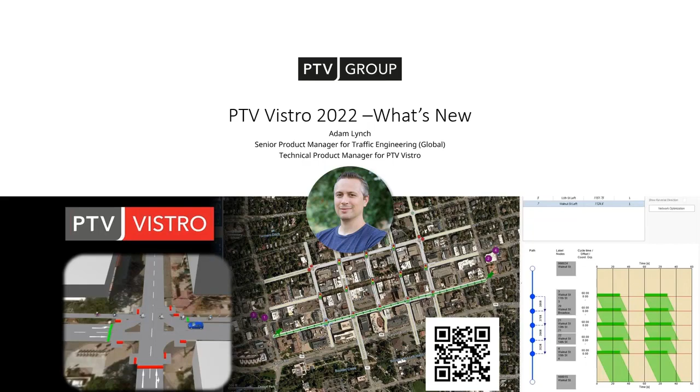So I'm going to begin our first part of the presentation with the what's new. It's again great to see so many of you joining our session. I think we're up to about 150 or so attendees right now, so that's pretty amazing to end a year with. And I'm very excited that you're excited to learn about our what's new and also about the HCM 7.

I do want to give you a little bit of a look at some of the recent activities that we've had in our Vistro community. I think this is a good place to end the year. A lot of this is because of your efforts. And the first thing I want to highlight here is this video that's up in the top right corner. This is a presentation from Beth Ostrowski and Adam Moser. And this was presented at the ITE spring meeting, so it's not brand new, but it's been around since the spring meeting, and it's for the Tennessee section as well as the Deep South joint meeting that they had.

This is a great video that discusses benefits of Vistro, especially coming from someone else other than us. So it's always nice to see it from the other side of the fence, as well as you get to see how Vistro is being applied on real projects and not just our examples that we show you. So it's definitely something I would say try to Google for, or when we pass out these slides, maybe we can send you this link to this one.

But definitely, if you have presentations that you're presenting in the industry, please let us know. And of course, we like to collect these and potentially share them as well with other customers and other agencies. So thank you again for all of your efforts with the presentations and mentions of Vistro through the past year.

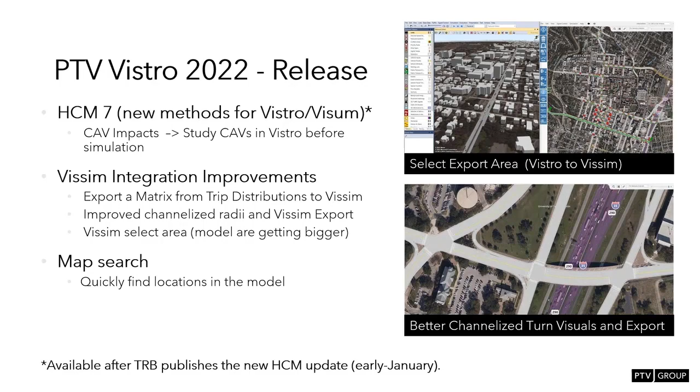Okay, so first, let's look at this function right here. This is the trip distribution matrix import to PTV Vissim. It's now possible to export the trip generation distribution data from the Vistro tables and then import that into Vissim as a matrix. And so this is something that users have been requesting, a way to create matrices in the Vissim side from Vistro, and this feature will deliver that.

It's extremely helpful for those who want to do some dynamic assignment modeling in Vissim, as well as use Vistro to be the place to start and then have your dynamic assignment models being created automatically. So this is a really quick shortcut to get into DTA, and it also reduces a lot of the learning curve on the DTA side, because again, your matrix will be created.

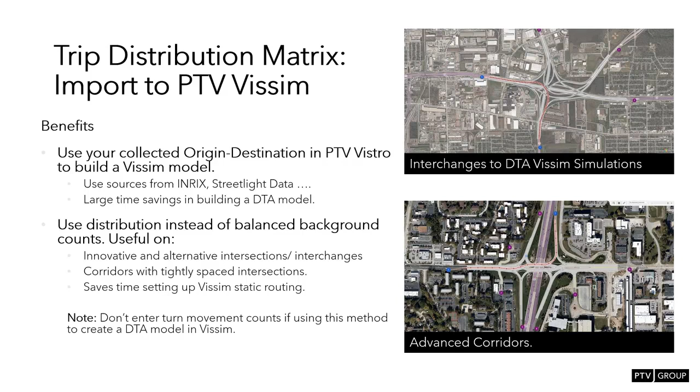You'll have all of the parking lots, I mean, those detectors, but they're technically called parking lots. All of those will be created to have the ins and outs for your matrices and your matrix sums. And the nodes will automatically be created between each junction. So this is, again, a very streamlined way to start using DTA, and it's coming straight from Vistro.

And it happens in a few quick steps. One, you would basically just put zones all around your traffic study, and these are the same zones that you would use for your trip generation. These represent the zones that you would have for any matrices if you did this on the Vissim side.

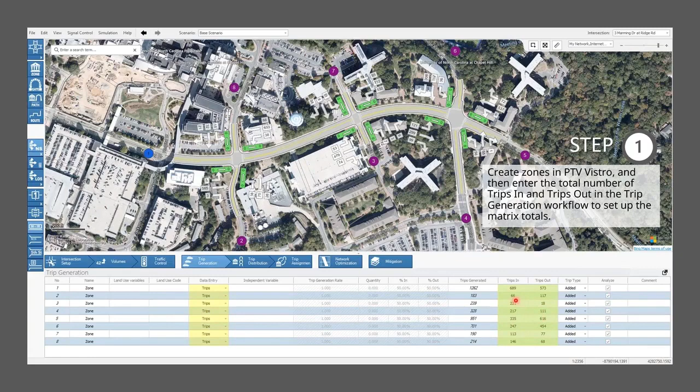You would put the ins and outs of your zone data. You would type in the in trips and the out trips, and that represents the ins and outs of the matrices. Then on the next step, you would go ahead and put in your trip distribution percentages to these zones, just like you would for any other traffic impact analysis, but this time it's for your dynamic assignment.

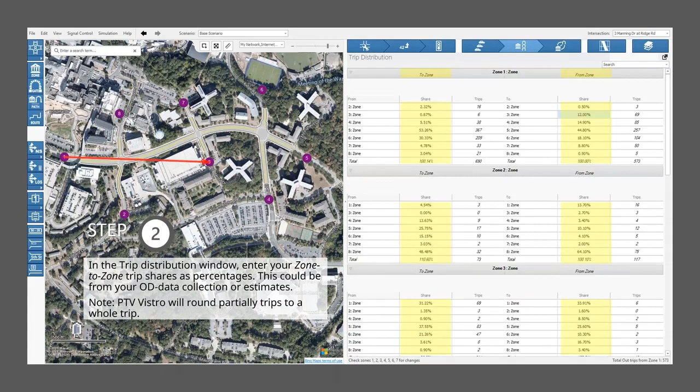Finally, when you import this into Vissim, you would do the ANM export process, but this time make sure you check the dynamic assignment option. That's the little radio button in the middle there. And then make sure you also have the import routing checked. This will export out a routing file that you'll have to put in on the Vissim side so that it knows what to do with these routes. Make sure you get those two things checked, and then just do your standard export and import.

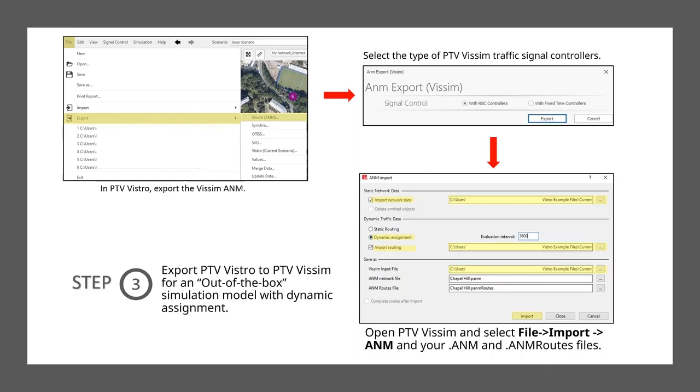When it comes in on the Vissim side, you have the matrix and you have your network converted in there, and basically all of those zones that you had in Vistro are now turned into parking lots, as I mentioned before. You have the ability to adjust the length of the matrix and set it up the way you want, so you have your burn-in period and maybe a cool-down period, however you want to adjust this.

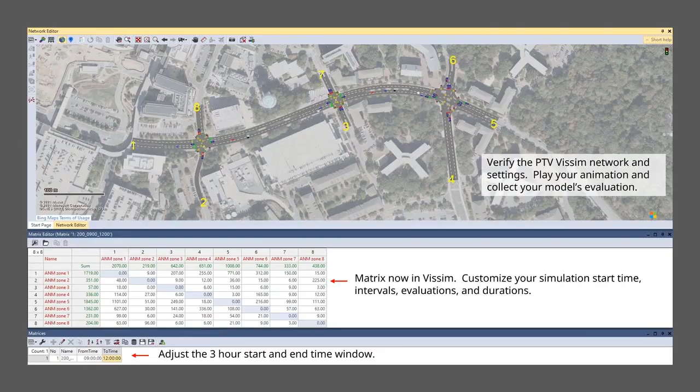I love showing these pictures. You get your nice out-of-the-box simulation from Vistro straight into Vissim, and you get stuff like this where all of your lanes are matching the geometries perfectly, and you have all your traffic volumes, pedestrians, and signals in the model.

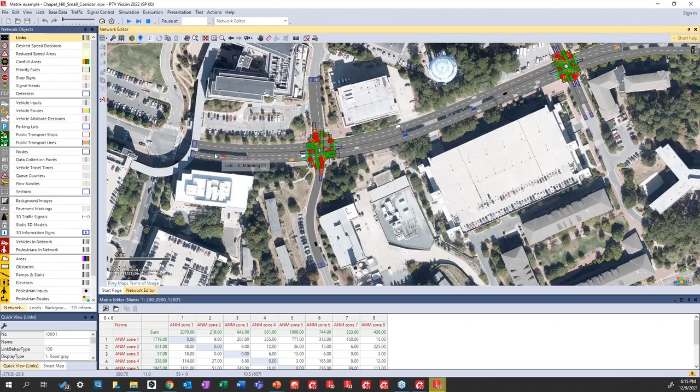So real quick, let's just jump into the Vissim side here for a quick look. This is that same model, but now it's not a PowerPoint slide. If I zoom in a little bit, you can see these are the parking lots that came in from the zones. It says parking lot 1, and it also says which node it came from, and that matches the node from Vistro with the same node numbers.

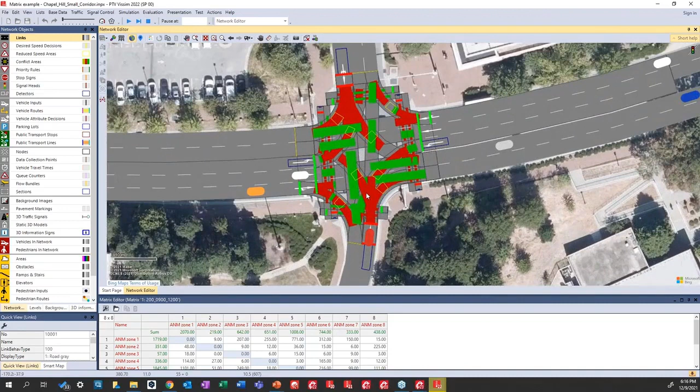As well as, if this is the first time you're seeing it, you get your conflict areas, you get your speed decisions, you get your detector data. Let's turn the conflict areas off for a second. You get your nodes underneath that, as well as signal bars. So pretty much all of the level of detail that you need to make a Vissim model is now coming from Vistro to Vissim, including some dynamic assignment elements. Pretty cool stuff.

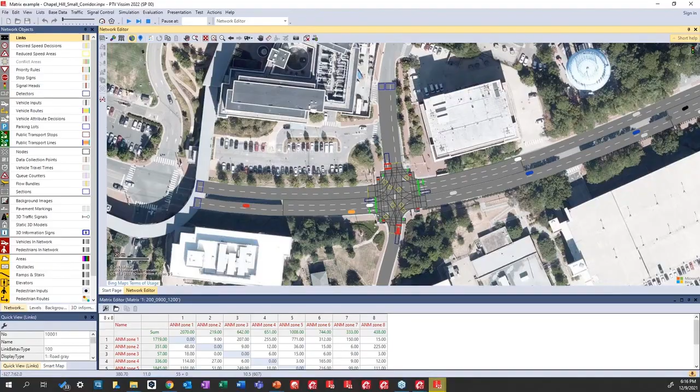All right, so let's go back to our presentation here. The next feature I want to show off is this improved channelization feature that we have. With this feature, we now include the crosswalks on the channelization, so you'll get the little zebra crossing on the turn itself. This also makes the export to Vissim more accurate.

Having that crosswalk there will also show in Vissim, and it will help you figure out where to put stop bars and things like that at a better location. So it just cleans up a few more things on the conversion that you won't have to worry about anymore. What this looks like on the Vistro side is this typical intersection that you have with channelized turns. Again, look at how it matches the base map, and it's wonderful to see. You get your nice metrics and things like this.

You can kind of see, again with the laser pointer, it's a little slow coming through on the feed. You can see that you have your crosswalk on that channelized turn now on the Vistro side there.

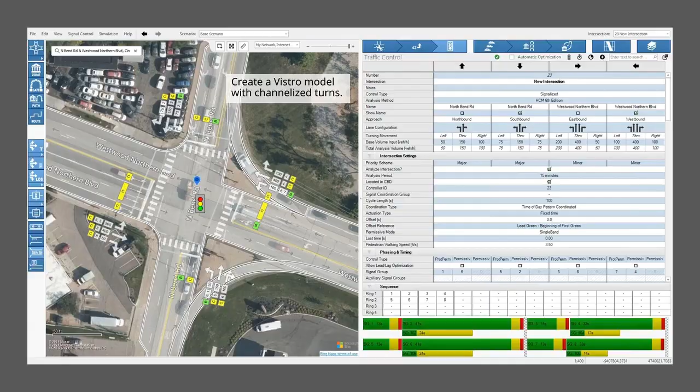When this comes into Vissim, it's a pretty close conversion out of the box. The one thing I added in this illustration is I quickly connected my crosswalk up to a walking path through this field here. This would be a proposed walking path because there wasn't one in the existing base map, so I didn't have floating pedestrians going through the grass. To do something like this is very fast to export, and then you can modify it any way you want on the Vissim side. So it's definitely a good place to start.

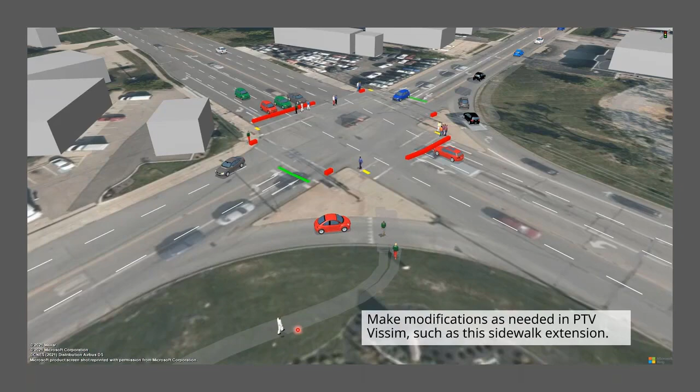The last Vistro to Vissim improvement I want to show is this ability to select intersections to export to Vissim. This is one of my favorites we put out this time. If you have the city of Austin, instead of exporting the entire city to Vissim, which might take longer to run the models, especially if you're only focused on one intersection or a corridor, now you can isolate that intersection or corridor and do that specific traffic model. This gives you the ability to mix and match and get exactly what you want on the Vissim side.

This also allows you to potentially augment an existing Vissim file with new data. You may already have an existing file in Vissim, and then want to add a few extra intersections to that file. You can generate a lot of stuff in Vistro for another study and say, wait, I had those two intersections on a previous project, let's just bring them into Vissim. So you can grab them and put them into Vissim. There's lots of use cases for this.

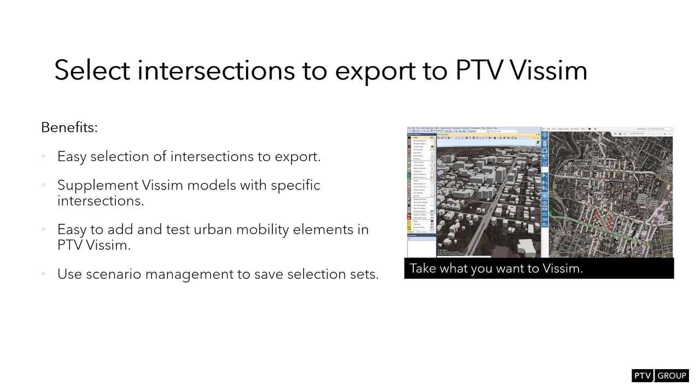This uses the analyze checkbox button to work, and I'll show you in a second. If this checkbox is checked, then the model will be exported, that intersection will be exported to the Vissim model. If it's unchecked, then it will not be exported to the Vissim model. So this is just a new concept to be aware of.

Sometimes people have these checked anyway for their reports. So if you have it set up for a report, you can always save a scenario of your report settings. That way, if you need it unchecked or checked just for a Vissim simulation, you can create a new scenario to use just for that. So it's a way to use scenario management to keep these checks and unchecks the way you want it, so you don't have to do any rework. That would be a good tip for this particular feature.

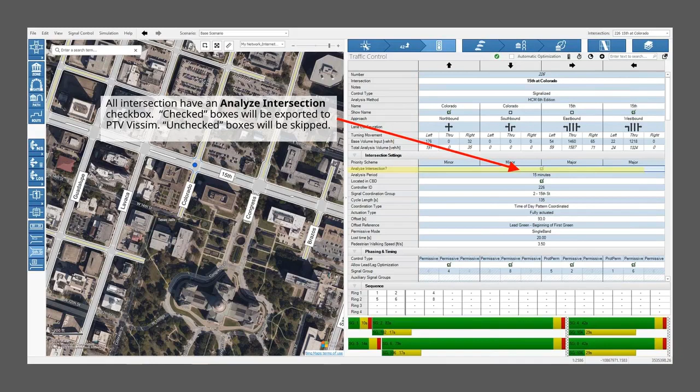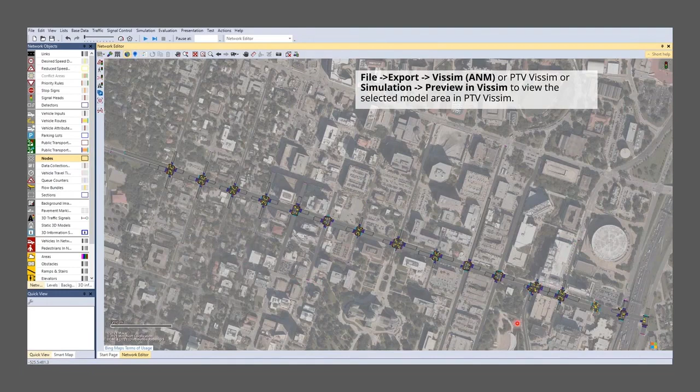In this example, we zoom in on the Austin model, and I want to just export the 15th Street corridor. I'm able to select all of 15th Street using the MultiChange tool, and I'll show you that in a second. Then on the Vissim side, you can go in and import that file, and you only get 15th Street in Austin instead of all of Austin. Enjoy your out-of-the-box simulation of just 15th Street in Austin.

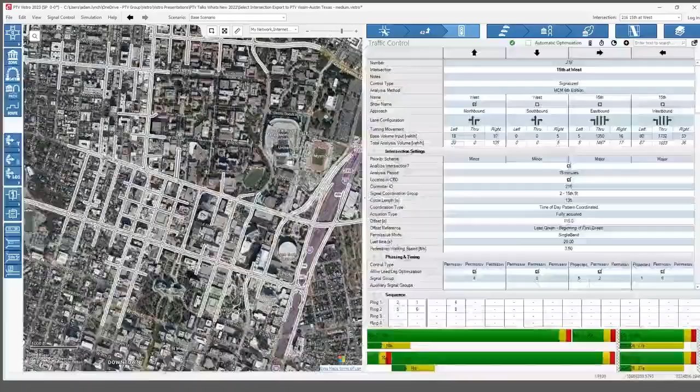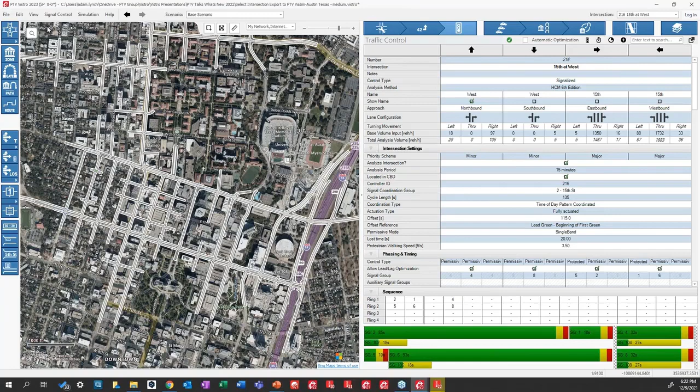Let's go into the software here and I'll show you this. I'm going to open up my Vistro—if anyone's paying attention, I'm actually in Vistro 2023 right now. Don't get confused, I'm only in that because the HCM changes are in Vistro 2023 that you don't have, but I have it. So don't get confused. All this other functionality I'm talking about will be in your version. Okay, so here's the city of Austin here.

Over in our grid, we do have the analyzed intersection checkbox that you can check on and off manually, or what I was saying before is you can go to the MultiChange to check on and off checkboxes. If I go to edit MultiChange, you get basically the list of all the intersections within your model here. Then you can pick the attribute analyze intersection, and you have the two values, true or false—true means it's on, false means it's off. You could do this for all the intersections.

So if I click false and hit apply, the note at the bottom says value analyze intersection was set to false for 87 intersections. And you can see in our table over here on the traffic control table that the analyze intersection checkbox is now unchecked because of MultiChange.

And then if I go to true again, it puts it right back to set it up. So I'm going to turn everything off just so I can isolate one intersection here.

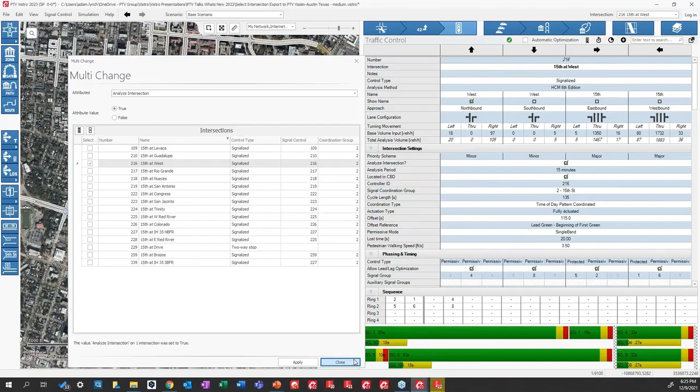Now, if I zoom in at that location, I'll slow down a little bit here because I think it might take a few seconds to catch up on the feed. So if I zoom in a little bit, this is 15th Street and West on the left side. But if you look at the intersection on the right side, the neighbor, the analyze intersection checkbox is unchecked, which is exactly what I wanted based on how I set this up.

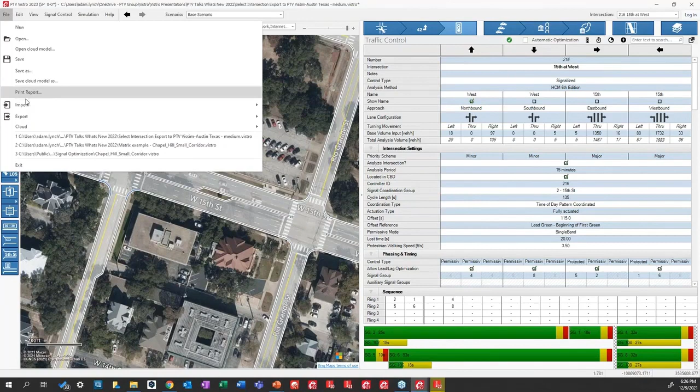Okay, and then you could go to the file, export ANM, and I'm not going to do this because I already have one prepared for you. File, export ANM, and then when you export it out, it will only export one intersection for you.

Let me switch over to Vissim here, and then here is my— you don't need to see my file folder.

Let me go to the files. One second. I have lost my filing structure. Give me one, there we go.

So here's my select area, and now I have my ANM for one intersection.

And if I drag this into my Vissim model, you can drag in the ANM files, you don't have to go through the import. That's always a little fun shortcut.

Now you can see that I have just the one intersection imported in from my Austin model instead of everything. And I can go ahead and hit play.

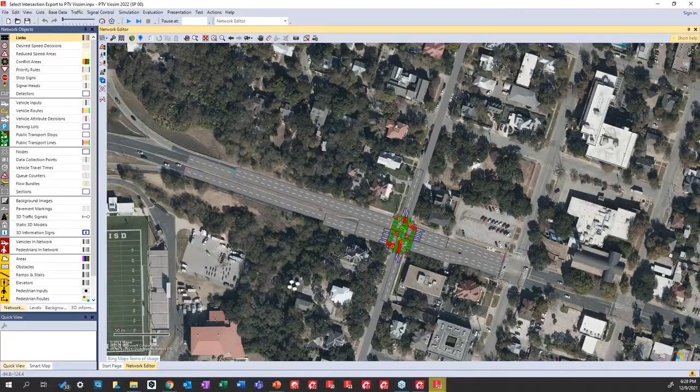All right, so that is that feature here. And now the last thing we want to talk about is this map search. And then this will be the segue back over to Bill after this. Well, I guess we have a poll question first, but let's quickly knock out this map search functionality here.

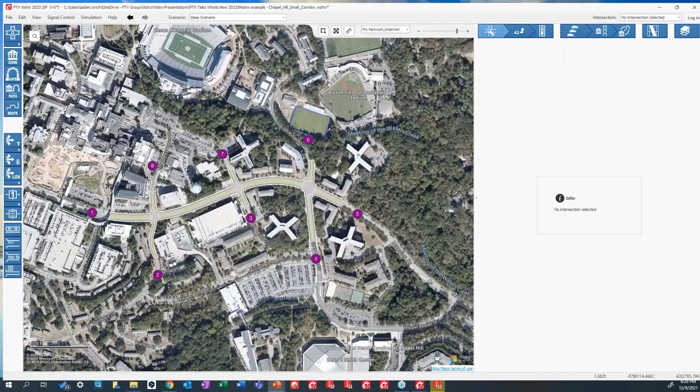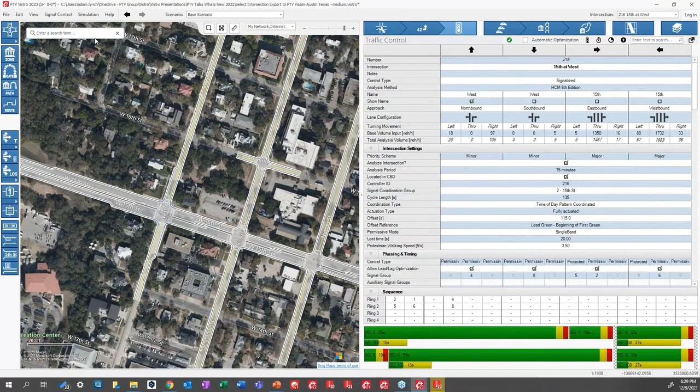So if you've noticed in the software, if you had Vistro 2022 open, there's this little magnifying glass in the upper left corner here. And if you click on it, you now have a field that says enter a search term. So this is a way to search anywhere in your network for an intersection, maybe a point of interest.

If you start a new model and you start with the Bing maps really zoomed out, you could search for a city to help you find the place that you're looking for. And I believe most of the time it'll even find an address, I guess it depends on how you write the address. We're still kind of learning things as we go, but most of the time you could get an address in here. But for this example, since we're in Austin, I just want to search for a point of interest.

So I'll search for the Texas State Capitol. And you can see as I'm typing, it's suggesting different things.

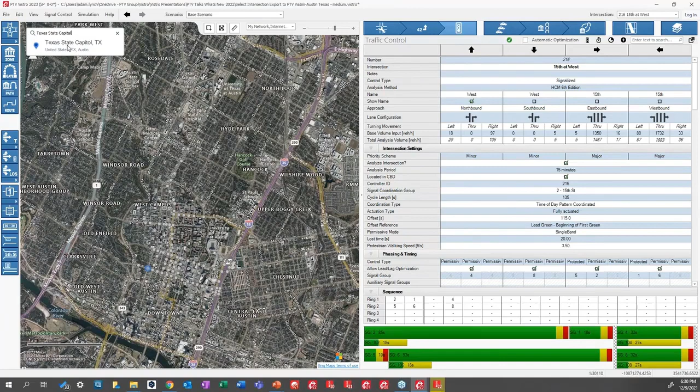But when I complete Texas State Capitol, now I get the actual point for Texas State Capitol. And then you would just click on that selection and you can see the little blue dot now is right on top of the Texas State Capitol. So that is the map search functionality.

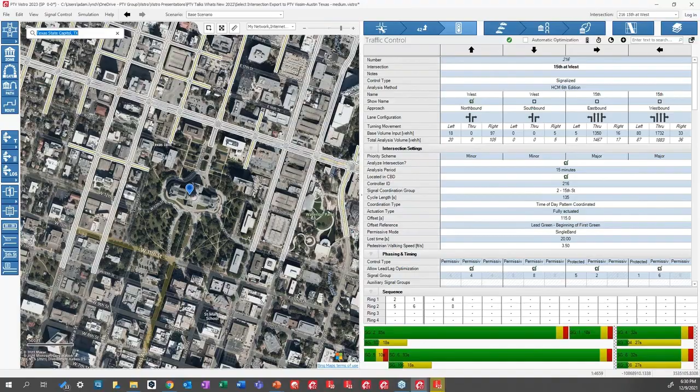Okay, so this ends my part of the presentation right now, and I'm going to turn it over to Jamie to do the first poll question, and then Bill will kind of transition in. Excellent. Okay, so I will begin, and just to review where we're at on the agenda. So we're going to cover a little bit of the overview of the HCM 7th edition items, and then I will dig into the software and show some of the implementation, and then we'll go back for a full Q&A on the whole session.

All right, with regards to HCM 7th edition, as Adam mentioned earlier, it's not yet published and released by Transportation Research Board. They are planning to release that, as the asterisk notes, during the annual meeting this January. This version of the manual will come in two variations, one being an electronic publication, I'm told, which will actually be more than just a PDF, but actually on a platform that makes it easy to use on tablets and phones, et cetera. And so that version is going to be released by TRB actually during the annual meeting.

Also, if you're going to the annual meeting, you can search by our subcommittee for the Highway Capacity and Quality of Service, which is code ACP 40, and you can see all the events that we have going on, including a lectern session that will be titled Highway Capacity Manual Upgrade, What is New for the 7th edition? And that'll be on Tuesday the 11th at 10:30 a.m. And that will cover all of the new things for the 7th edition.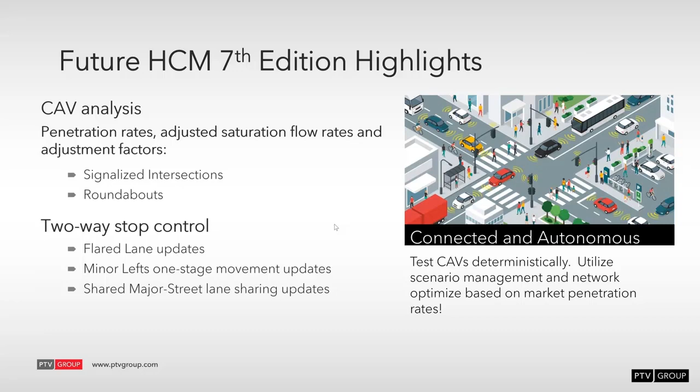There's also quite an exhaustive methodology going into the uninterrupted flow chapters as well. And then from a two-way stop control, there's some updates to flared lanes and minor lefts with one-stage movements and shared major street lane groups. So we'll talk a little bit about those, but mainly we're going to focus on the CAV analysis and how to implement that at signalized intersections and two-way stops. So before we go into the software and actually dig into how to do it, I'll spend a little bit of time on the HCM itself and how we got here.

And this particular set of research that fed into these CAV analyses within HCM was derived from an FHWA pooled fund study, TPF-5(371). We love acronyms and numbers, of course, in our field. You can do an internet search on that to find it for yourself, but it was quite an exhaustive research effort led by Kittelson & Associates as a contractor, spearheaded by Oregon DOT as the primary state DOT, but there were other states involved as well.

Something to note is that basically all these factors made their way into the Highway Capacity Manual, which, if you remember, is a deterministic level of analysis. It is not simulation based. However, in order to determine the factors to implement at a deterministic level, the research derived all those factors from microsimulation, primarily using Vissim, just as a little side note there, and basically backed that into a deterministic level of analysis.

So an interesting note is this is the first time from a highway capacity perspective, as you can see on that note, well, the upper part anyway, that they're not field validated due to lack of CAV market penetration in the field. So it's really a departure for HCM. Normally everything is deterministic and derived from field data, but of course by its very nature, CAVs are not in mass, and so there's not a way to collect that data yet. So it's all derived from simulation.

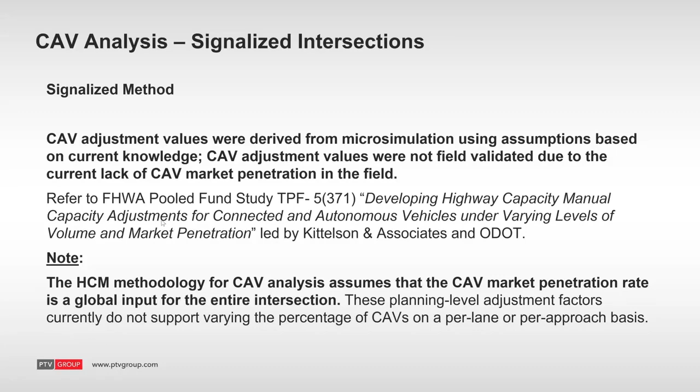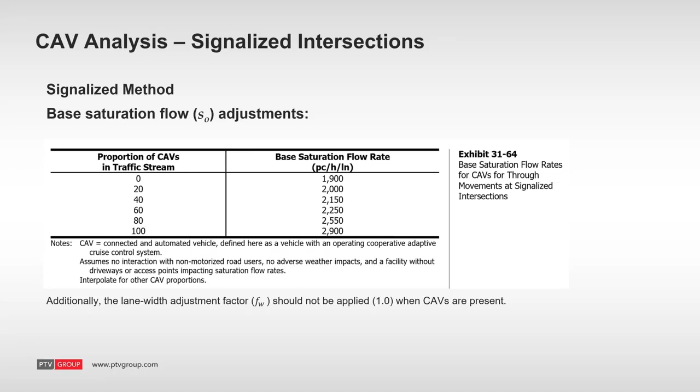And if you think about that, that makes sense. The lane width adjustment factor has a lot to do with driver comfort level. Narrower lanes, meaning they might not go as quickly, which means there's not as many vehicles that can be processed. Once it moves into the CAV world, then the driver part of that comfort level starts to go out of the window and gets removed by the technology. All right, so with that, the other aspect is beyond the base saturation flow. So that all applies to this S sub 0 or S naught.

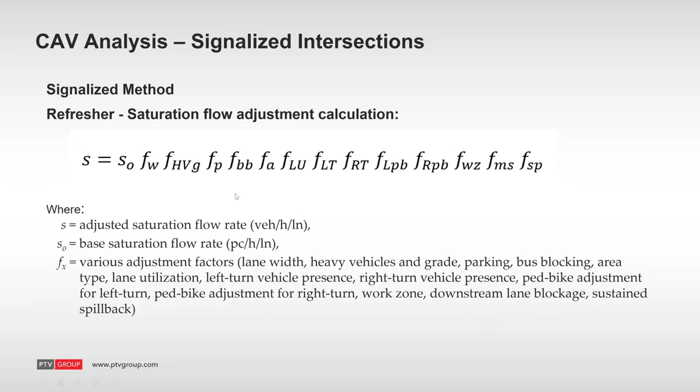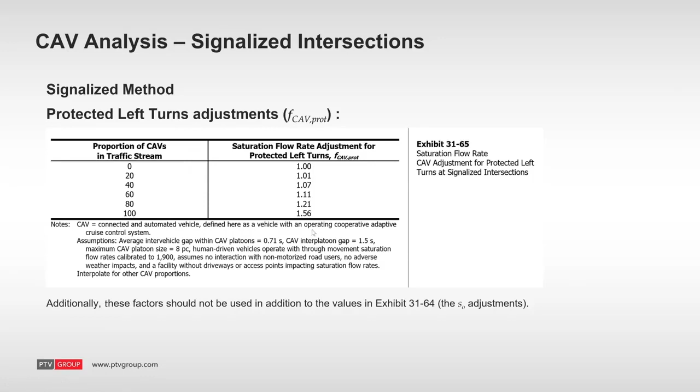After that, then we start to look at where does it apply to specific factors. And so that's where the left turns come in. Sorry, we'll start with this protected factor. And again, that uses the proportion of CAVs in the stream as your input. And from there, it will give you an adjustment factor for that analysis. And so there's some other things here, but basically there's a table for protected and a table for permitted, and the permitted varies by the opposing through rates. So that's the background for signals.

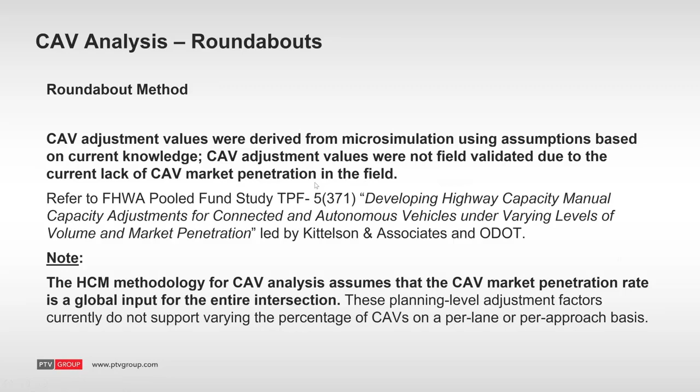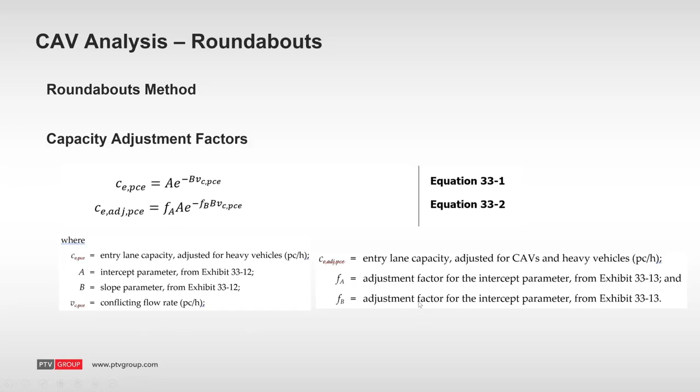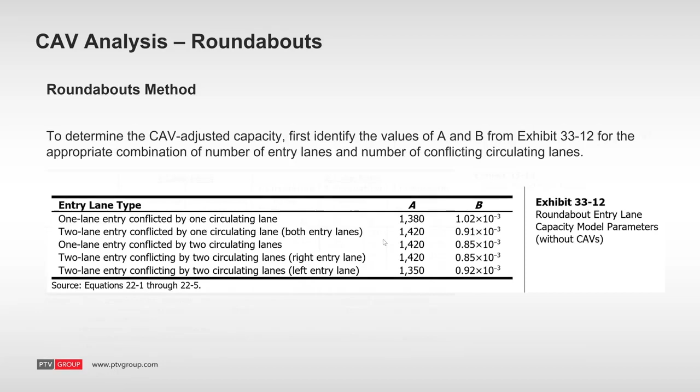And from there, we get into these tables. This is our pre-CAV, without CAV. That's what we were doing already as far as the factors for the parameters A and B. And then after that, based on your entry for your proportion of CAVs in the traffic stream, and also depending if you have a single lane entry or a double lane entry, whether you have a single circulating lane or two circulating lanes, and some other variations on that theme, it will go ahead and pick off what your new adjustment factor would be.

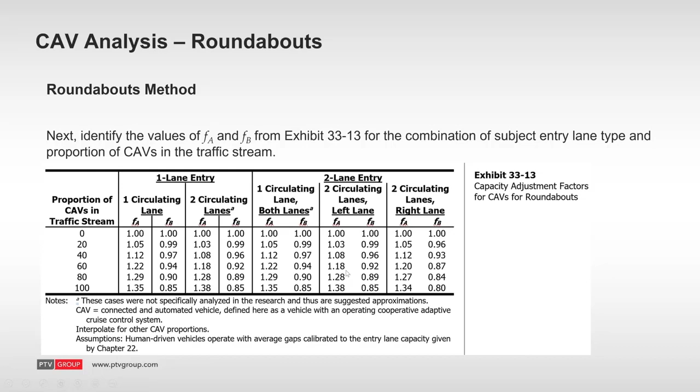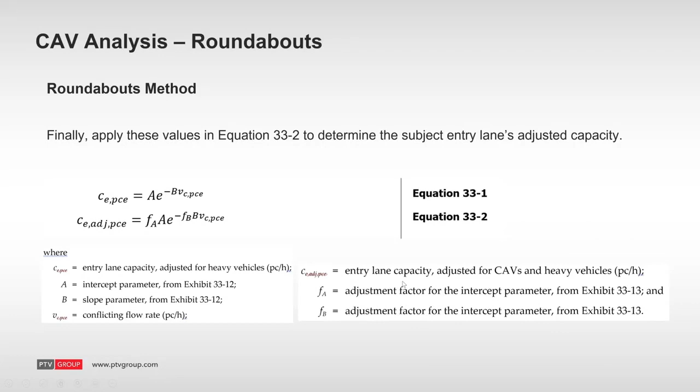And of course, interpolation is allowed, and that's what we do in Vistro. From there, plug it all back into the equation and get your new entry lane capacity adjusted for the presence of CAVs.

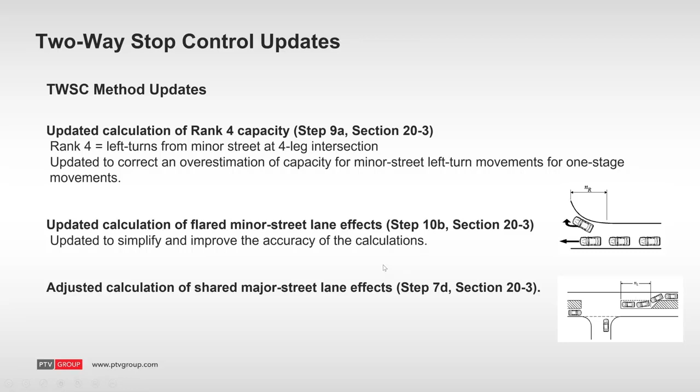Some updates to the two-way stop. As I mentioned before, basically some modifications to minor street lefts and flared lanes. This has been in there already, but there are some things to improve the accuracy of the calculations and to simplify it. And also when you have a shared lane on the major street, the image from the HCM shows a separate little pocket, but that's because it's a short distance, or if it's an actual shared left-through lane. So those updates are implemented as well. What I'm going to do now is show you how to apply those in Vistro in the time we have remaining.

All right, so you may recognize this network from one of our earlier PTV Talks, and basically what we're going to focus on today are some things regarding the signal and what will be a roundabout in a future scenario. Also a refresher on how to create scenarios and so forth. So the first thing, we're going to look at a case. Let's say I want to look at some year in the future. I want to look at what my results would be if I have 0% CAVs, and what if I have something that's non-zero, and how could I compare the difference? Vistro is just prime for all these alternative scenario comparisons.

So the first thing I'll do is come into here. I want to build a 2030, because I know there's no CAVs at this point that I want to study. So I'll go into my scenario manager. I'll duplicate that scenario. That'll give me scenario 4, which is a copy. I'll rename that, and I'm just going to call that 2030. 230, we're really going back in time. Okay, and then to remind myself, I'll say this is 0% CAV, hit enter. In Vistro scenario management, you always want to make sure you click it, and always be looking in your white box to make sure you're in the appropriate scenario.

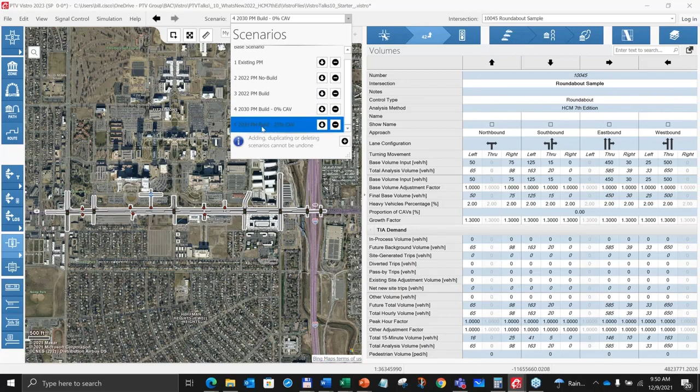So then I'll go in and duplicate this scenario real quick and press the down arrow, rename, and wipe out this. And 2030, and let's do 25% CAVs. Let's go ahead and select that and make sure that that is our active scenario. All right, now we're ready to have fun.

We'll go into the signal, and I'll be here at volumes. And you could technically have a different proportion of CAVs at each intersection. It just has to be at the intersection level, but we're going to do it network wide for simplicity's sake, and for planning purposes, that's probably the most realistic thing to do anyway. So I'm going to go back, edit, and MultiChange, and I'll just pick that variable, in this case proportion of CAVs, so I don't have to enter it at each intersection. I'll go ahead and put in 25 and apply that.

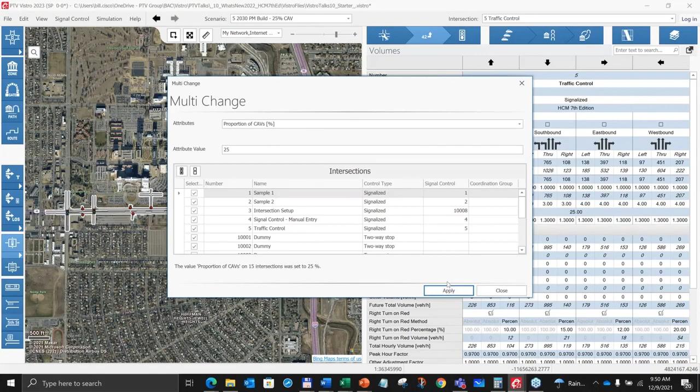Close that out. What we'll see is that it has added my 25% proportion of CAVs in my volume screen. And then if I toggle to the traffic control table, I can see the effects of that entry. If I scroll down to base saturation flow, I'll see that it has adjusted from 1900 up to 2037, which was an interpolated value between the numbers in those tables that I had shown you earlier. You don't adjust the base saturation flow rate on the left turn. Instead, it uses a factor for the left turn adjustment that's also calculated from the second set of tables that I had previously shown in the PowerPoint.

And the other thing, I mentioned it, but I didn't show it exactly. If we were to toggle back to our 0% CAV scenario and pick that same signal and look at the nuts and bolts here of the sat flow adjustments for the lane width, right here, the F sub W, we see we have one wide lane that gave us a 1.04. So it bumped up the saturation flow because we had, I think, a 14 or 15 foot outside lane there.

But again, as directed by the HCM method, once we implement CAVs that are greater than 0%, then that FW value also will go to 1.0 as part of the adjustment. So that goes down to 1.0. So everything checks out and we get new results with our final sat flow rates that reflect the presence of 25% CAVs at our intersection.

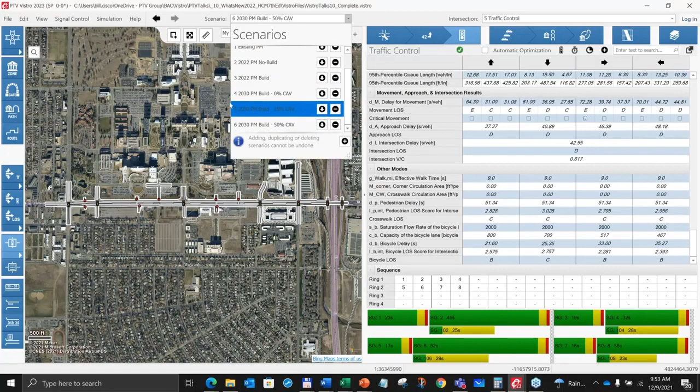All right, in the interest of time, I'm going to toggle over here to my completed network. I think you guys get the gist. I duplicated the scenario at 25% and then entered another scenario with 50% CAVs just to show you that I did it. There's the 50% there, and then we get even greater bumps to our saturation flow rate over here. Now we're at 2200 per lane instead of 1900, which went to 2037, and is now at 2200. So you see the increase in saturation flow based on the increase of CAV percentages.

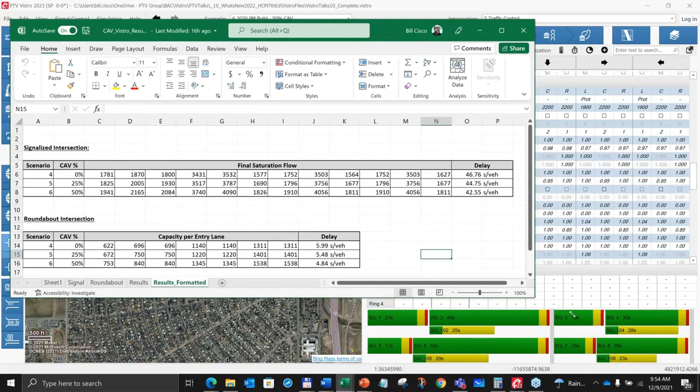So, in these cases, these intersections were not operating horribly to begin with. These were level of service D and level of service A, but you may have other cases where you see more drastic results. Just as a little example here, we can see clearly between our three different scenarios with our different CAV percentages our sat flow adjustments: sat flow is going up, delays going down, capacity is going up, delays going down.

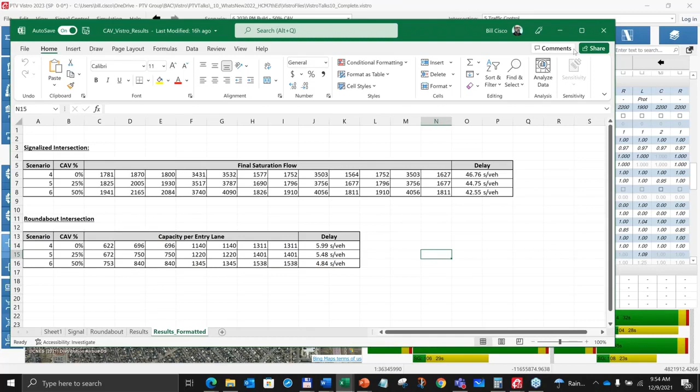So that's essentially the gist of the implementation of the CAV analysis at signals and roundabouts using the HCM 7th edition.

So again, the other thing is if you're starting new networks, of course, under edit global settings, there's always been this analysis method option, and now you'll be able to do the 7th edition once the service pack gets released. It'll be at least January 11th at the earliest, but probably slightly after that.

And there's also a place here where you can do your proportion of CAVs globally that would affect the new network elements. Otherwise, if you have an existing network like what I had here, then you'll definitely want to use the multi-change that we had gone through in this example. All right, with that.

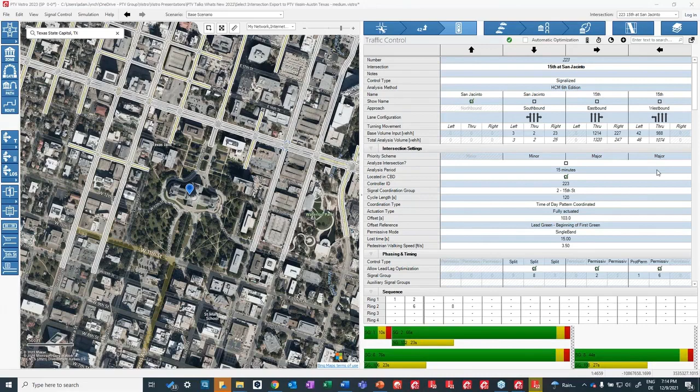Okay, so this question was about optimization and how to manually enter a cycle length for the optimization versus having the best cycle lengths adjusted. So there's a way to do this. I can show it locally. If I just click one of these intersections, you are on the traffic control tab up here, and you have these optimization tools. The first one is default signalization, of course, to set everything up the way it will be set up with NEMA.

And then you have the other one next to it that looks like a stopwatch, and it says optimize split and cycle time. If you click on this, this is where you can just type in the two bounds being basically the same number. I do this a lot, actually, as you can see from my example. And this will give you 120, and it will just optimize the splits for 120.

Another thing you can do is this try set in here, and you're able to specify the specific cycle lengths that you want to try to optimize to. So if you really were only interested in 60, 80, 90, you could go ahead and just type in 60, 80, 90 with the comma, and those are the only three cycle lengths that would be tested for optimization. And it's similar in network optimization as well, so it's kind of the same look and feel there. Yeah.

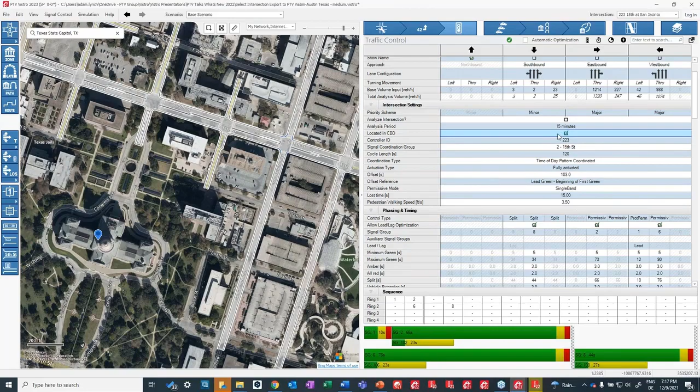Secondly, I don't know that we have that checkbox, but what we do have in Vistro, let me share my screen real quick, is the ability at any signal to modify the saturation flow component. And we have global effects on these too. But back to the saturation flow, you can override your base saturation flow rate. And these are not just things that we think people should just do whatever. It's more about our customer base.

We have various agencies throughout the US and Canada that sometimes want to make various sat flow adjustments part of their requirements. Some of them make that a requirement to the final number because they've done a bunch of studies in their area and say, instead of going through all the calculations, we just want to apply this final sat flow rate. And so we have that ability down towards the bottom of this table, where you can hardwire in by overriding your calculated rate and putting in whatever that agency stipulation would be.

That's also where you would do it based on field study. So if you did a sat flow field study rather than calculation, you check the box, and then from there you could put in whatever your actual number was, right? And that's per lane group. The other way that we have is these adjustments at the base level, and so that's where that one might come in, is an adjustment to the base saturation flow.

Again, if that is the case, you can check that and then change that value accordingly. And then the rest of the flow.

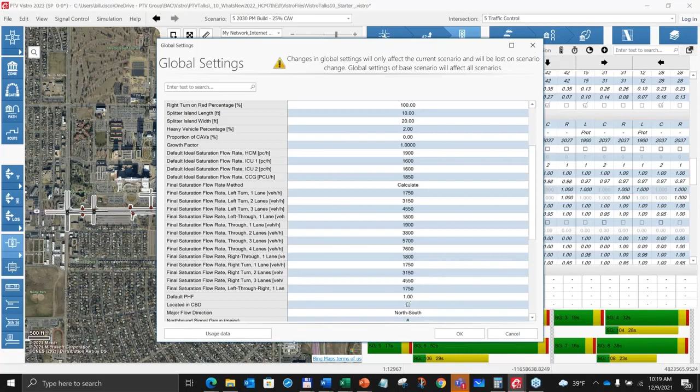And I think this 1750 is in that one actually. Yeah, and that's a perfect example of us meeting the needs of our agency customers in order for them to fulfill their objectives. So we're always open to hear what people need.

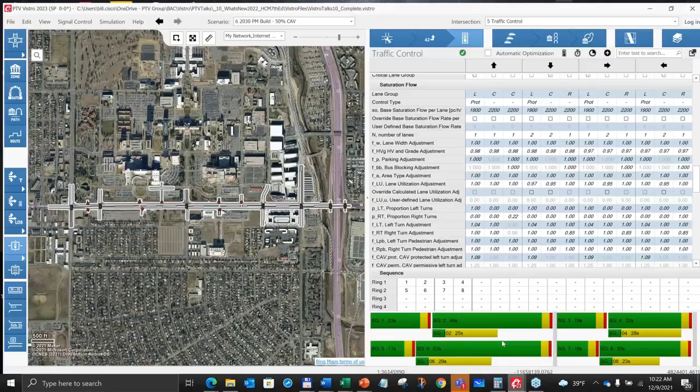We have seen multiple requests for this recently, and this is actually something I'm currently discussing with our Vissim team right now, so stay tuned for this. If you have an opportunity and you want to talk about this, you can contact me directly, and I can hear kind of what your thoughts are on that.

Is there a way I can get the LOS results printed to a report from the mitigation screen? So we're talking about mitigation here, not scenarios, I believe. Bill, are you still sharing your screen? Yeah, I can show that.

So for any of our intersections, we have a workflow tab called mitigation over on the right. There's a couple caveats here that I want to note. First, to answer the question, when you're on the mitigation screen, it'll first start with an unmitigated result. This is the same exact result as what I would get from the traffic control table, and the same result you'd get if you did file and printed reports from there.

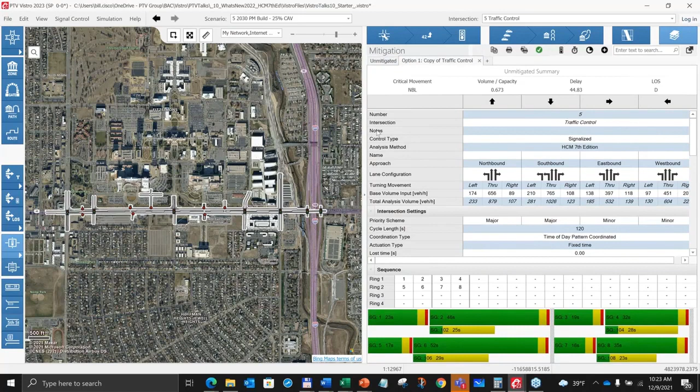But you can do a quick report from here just by using these icons, which is print this current option. Of course, the strength of the mitigation tool, that workflow, is to click the plus button, and at that point you get a copy. If you think of it like Excel worksheets, it has basically created a new worksheet, so now I can go in and mess around with testing different things and getting different results, but it does not actually change my network results.

So whatever I get in this screen, the only way to print the results is to do it from one of these icons at the top of this table, either print or print all the mitigations for this intersection at once. That's how you would print from the mitigation screen. If I have an option like this, it will not show up under file print report, but it will show up by printing within the mitigation tab.

Is it possible to save the settings of save report in Vistro?

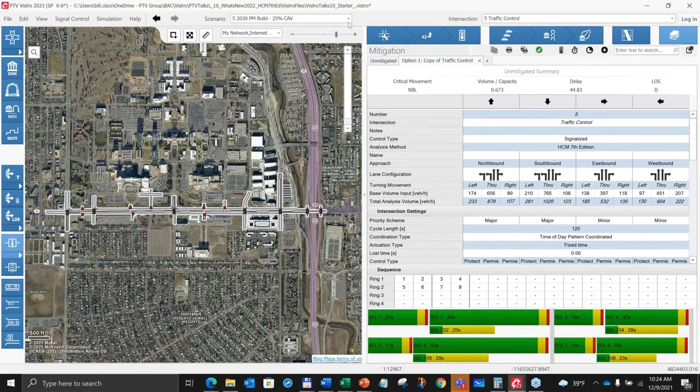I'll let Adam answer that. The key is the base scenario. Set up your reports in the base scenario, so go all the way back to the base. I lied, I said I was going to let Adam answer this, but I'm talking through it. He can add to it. I'll read the next question and get prepared.

When you go to the base scenario and do file, print report, you set up your parameters here. So like what file you want, of course, and whatever that might be, test. And you can pick where you want your page numbers, your report file name, your company name, and all that kind of good stuff.

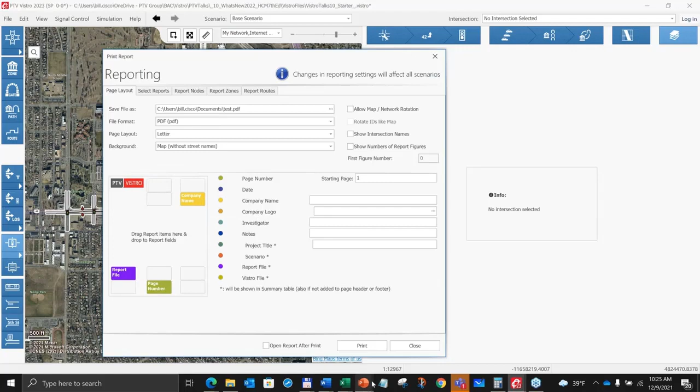If you set all that up, even which type of reports you want, do that under base. Base is unique, has a lot of unique properties. If you do it under the base case, that will become the default of your settings for things like headers and footers. Then you can always modify them as you go into each individual scenario to print.

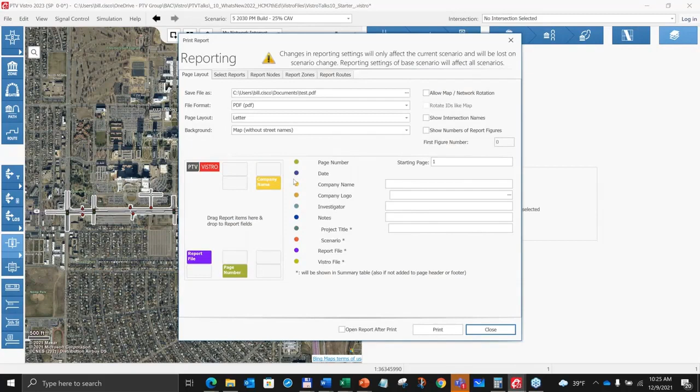One question started off with a lot of great comments on how Vistro is very useful and loved, so thank you for that. And then it got into the question: what do you think is a good way to do DTA in Visum? Is it coming from the Vistro side, like we just showed today for the shortcut, or from the Visum side? What is the better approach?

I think it may be, well, one, from what available data you might have, and two, probably what your study's objective is in the end. If you're interested in a quite large modeling area and you're doing very detailed Visum types of things, with the Vistro-like view in Visum now, you can get these geometries worked out pretty closely to what Vistro is doing. You could even start in Vistro and then import those changes into Visum if that's an easier process for you. But if it's a true large DTA area study, I would stay probably on the Visum side and go into Visum for the corridor, just because the data's there.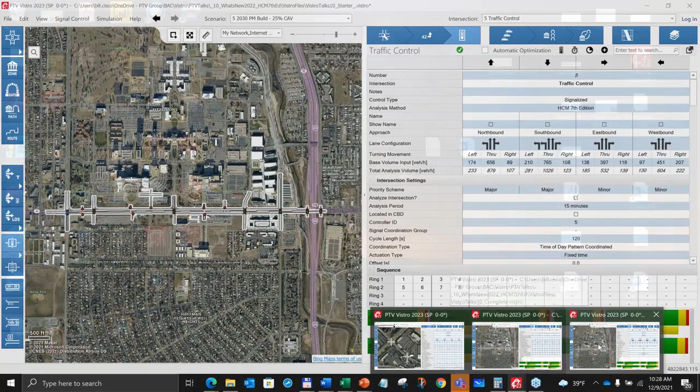A couple requests. Is there a way to rearrange scenarios, and is there a way to renumber scenarios to have them in order? These are on our list and we're definitely looking into this. The scenario list is in the order that it is created, and once you create the number, though, you can.

Bill, are you going to show maybe how to do a renumbering? Yeah, I can. Is it just through the rename? I don't know, it's just rename, wipe it clean basically. The whole thing, or just the number? Or just take off the 5 and put like a 10 or something. Yeah, it's still going to show 5 in front of it though, right? Yeah, so that's what happens right there if you try to renumber that.

So we're aware of this issue, and we're kind of talking about ways to do this, maybe with an alias, so on the front end it looks like you can order them differently and have a different number, but on the back end it still has the unique ID that it needs to do software stuff. But yeah, that's good feedback, I'll add it to the list. I know who you are now, and we'll see what we can do. For sure.

Is it possible to print a report for all scenarios together? That's also on the list. Yeah, it's currently one scenario at a time. Mitigation is you have the possibility to print all the mitigations within that intersection. I want to make sure I got that clear. But definitely we'll have that on the list. It's already on the list. We'll add another name to this.

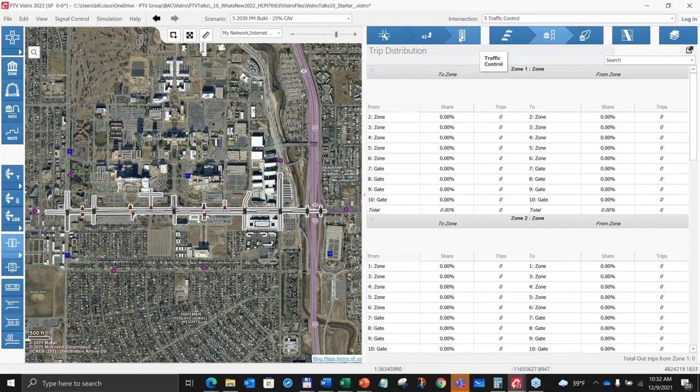Okay, so I think Bill's demonstrating this right now, but I think that's pretty much all of the questions. If you have any other questions, feel free to email us and send your feedback and comments our way, and we'd be happy to answer them. I think we got through everything, but if we missed a question and we owe you an answer, we'll take this list and provide the answer back in a few days.